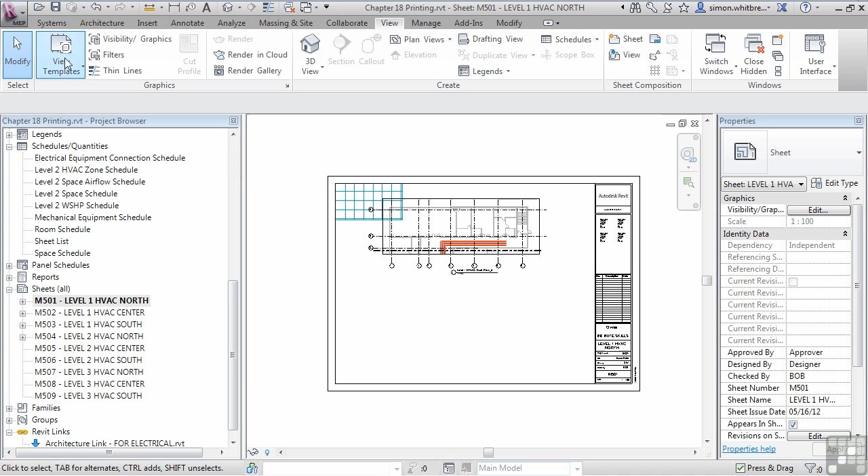From the Application button, click on Print. You can see I've got some default printers installed. I'm going to go with PDF Creator for this exercise. And what I want to do is look at the settings down at the bottom right-hand corner of the dialog box. In here we've got a name for my print setup.

We've got a paper size. Well, I know that my sheet is an A1. I need to choose whether this is going to be placed in the center of the sheet or offset from the corner, whether we have a margin, and whether we're going to fit to a page or zoom. Well, I always like my drawings to be 100%. Our orientation is landscape. We're going to use vector processing in this instance for removing lines.

I want presentation quality and black lines for my print. At the bottom here, I've got some other options.

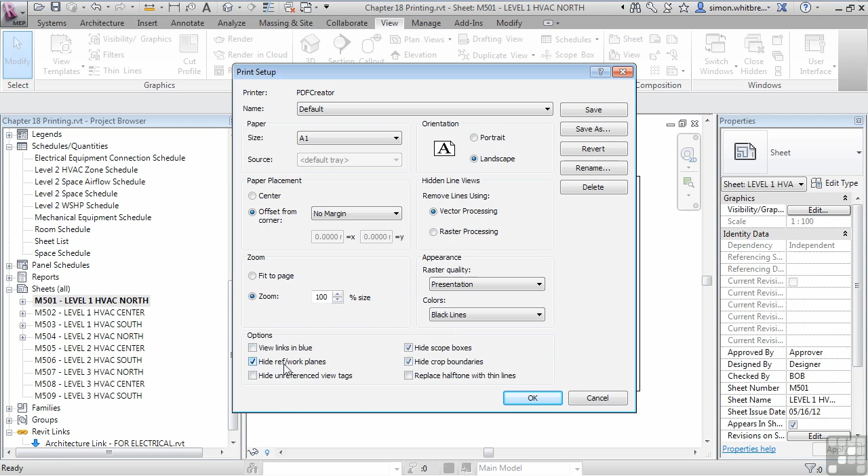Do I want to view links in blue? Do I want to hide reference and work planes? Well, generally they're messy and you don't want those showing on your drawings. Do I want to hide scope boxes and crop boundaries? Well, again, they're really for construction.

And hiding unreferenced view tags. If this is a construction set of documentation, I don't want anything unreferenced on my drawings. And finally, don't want to replace halftone with thin lines. If you're using halftone on the architectural model, sometimes it doesn't print out quite as well as you'd expect.

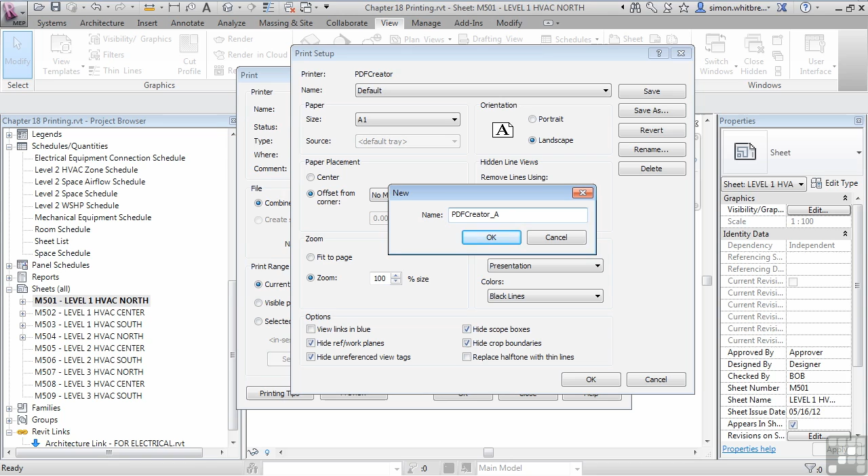So you can replace halftone with the thinnest lines available. Once I've set these up, I can save this as a printer setting. Let's call it PDF Creator A1 full size. And click on OK. Click on OK again.

What do we want to print? The current window, a visible portion of the current window, or selected sheets? Well, let's start with the current window and do a preview.

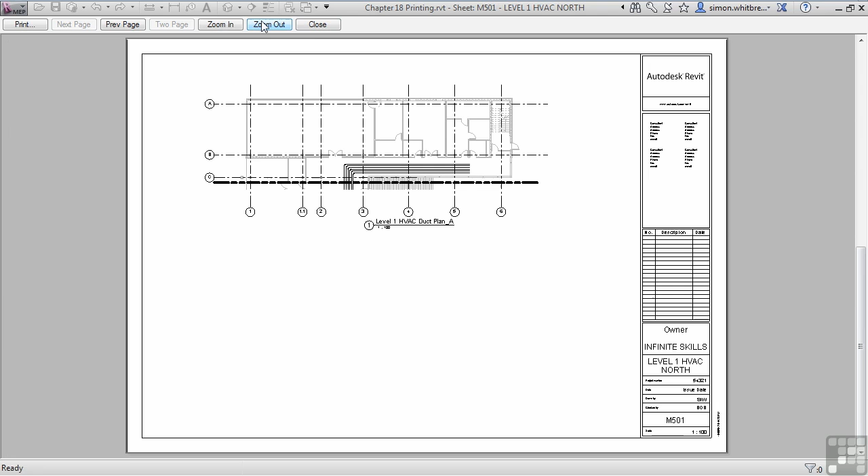I can tell you now that this preview looks horrid. The only reason we've got this preview here is to make sure that we're getting in the whole of our sheet. There's no other purpose to it. It looks like I'm missing half my drawing. But I'm actually happy that I can see the extents of my title sheet.

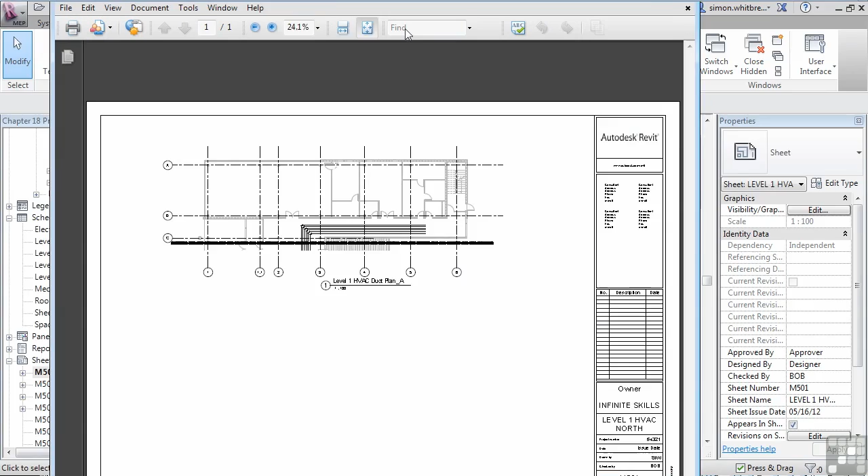So let's click on Print. I can now click on OK. This sets up my print job. I can browse to my project folder and click Save. I can then open up the PDF to examine my drawing. And this is exactly what we were after.

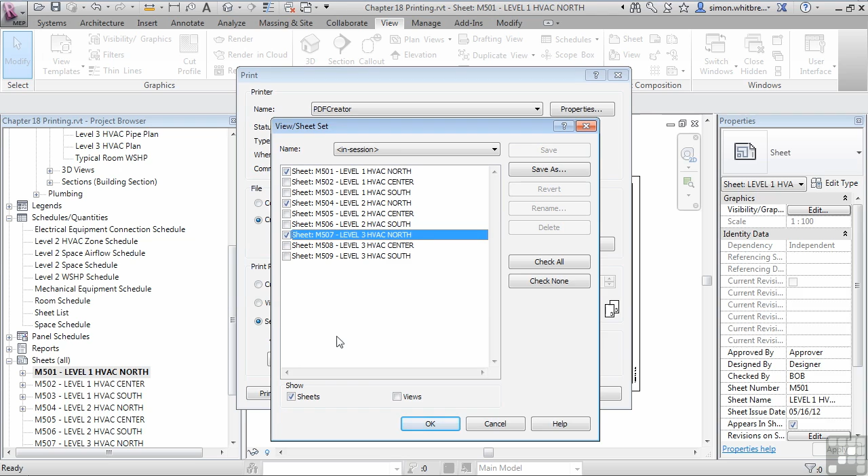Let's try that command again, this time with selected views and sheets. I'll click on Select, and I only want to see sheets. Put a check mark in all the North sheets. We'll save this as a list and we'll call it North Check Set. And click on OK. Click on OK again.

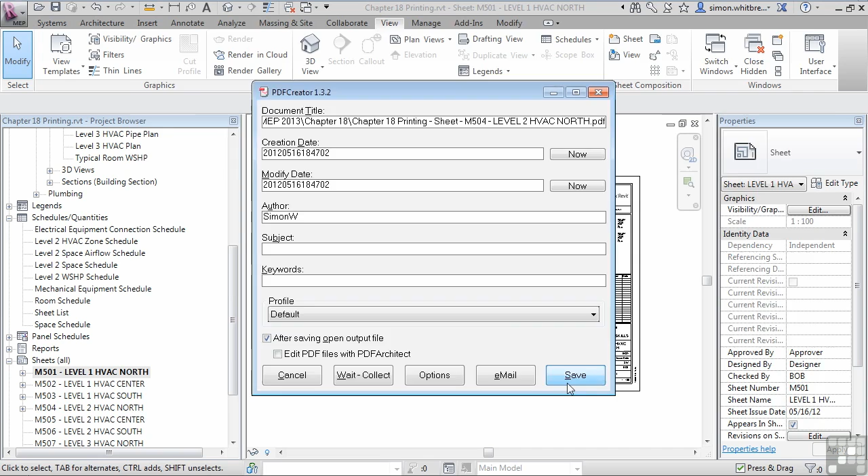Click on OK to print, and this sends the job to the printer. We'll save my print job. This goes through the 3 sheets, and you can see that I've got something to check on, as my Level 2 HVAC North is showing a central plan.

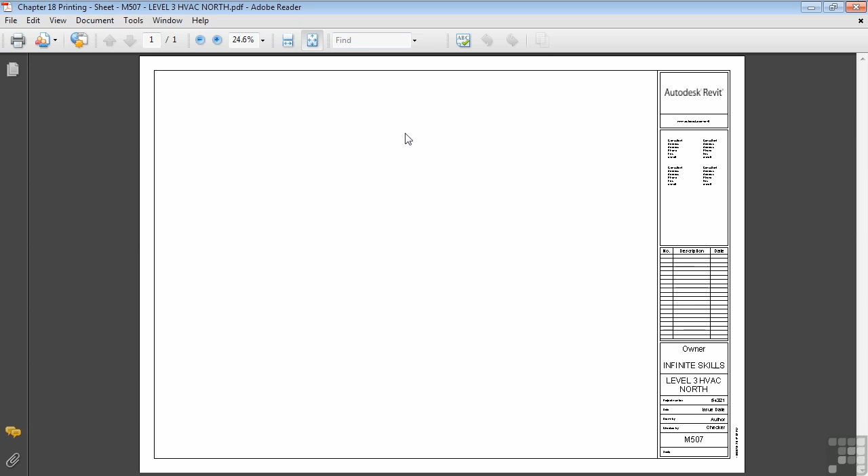And Level 3 North doesn't have anything on it at all. But as you can see, this process is fairly painless. If I go back to the print command again, you'll see that we now have a North sheet set available to us. And if I select it, it will have selected just those North sheets.